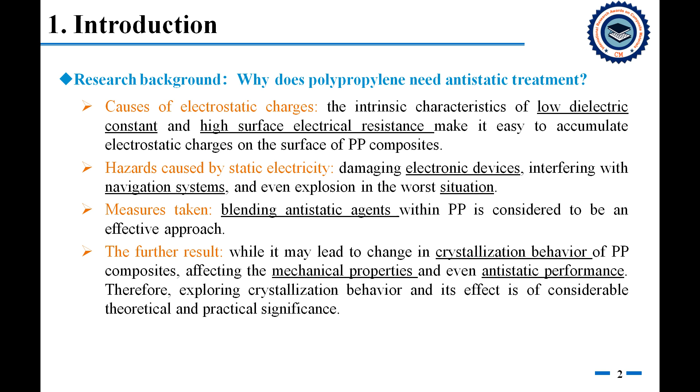The effective approach is blending antistatic agents with polypropylene. Then, we should consider the comprehensive results produced, such as crystallization behavior, mechanical properties, and even antistatic performance. Next, we review the research progress of antistatic composite materials. We found many conductive alternatives in fiber-reinforced polypropylene systems.

Carbon black was used. However, this type of filler needs more content than using carbon nanotubes. However, the dispersion of nanotubes requires a complicated pre-treatment process. Further, nickel-coated glass fiber was used as conductive filler to form a three-dimensional conductive network. However, this process involves some toxic material.

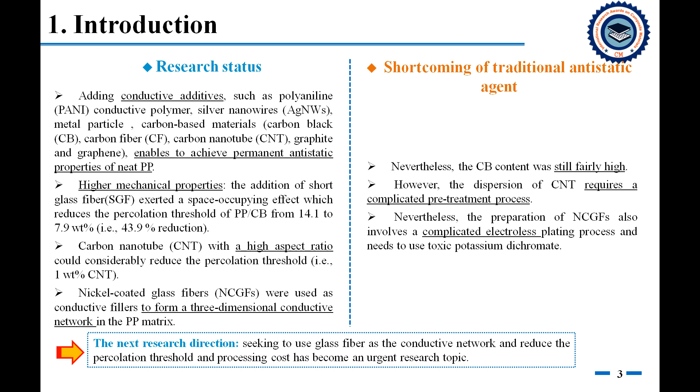Therefore, a promising organic salt emerged. Previous research found the percolation threshold of glass fiber reinforced polypropylene composites after adding organic salt is 0.25 weight%. Moreover, previous research used traditional high viscosity and isotactic polypropylene as a matrix and only explored the tensile strength. Nevertheless, there are still many technical gaps.

Such as crystallization behavior, the arrangement model of conductive particles, and the reasons for the increase and the decrease in the tensile strength. The chemical interaction mechanism among the organic salt, matrix, and long glass fiber. The other crystallization performance, such as nucleation and crystal growth rate, crystallite size distribution, phase, and lamellar thickness, as well as crystallinity. Polypropylene random copolymer with high weather resistance, low temperature brittleness, lower viscosity as a matrix.

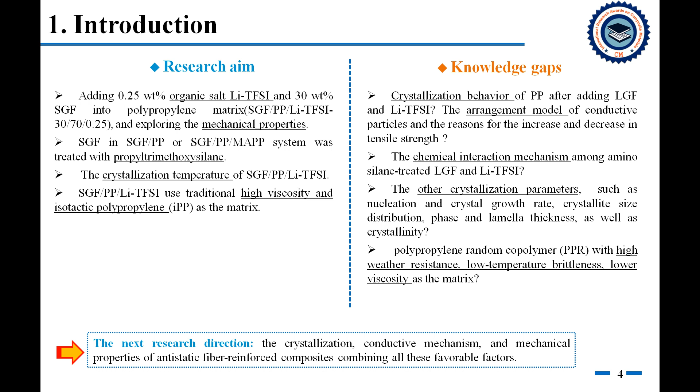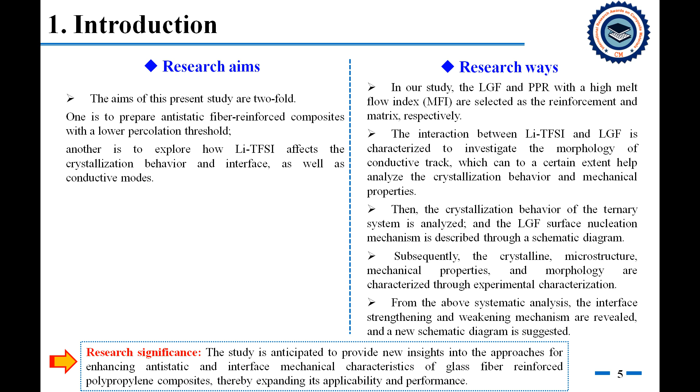Therefore, the aims of this present study are twofold. One is to prepare antistatic fiber-reinforced composites with a lower percolation threshold. Another is to explore how organic salt affects the crystallization behavior and interface, as well as conductive modes.

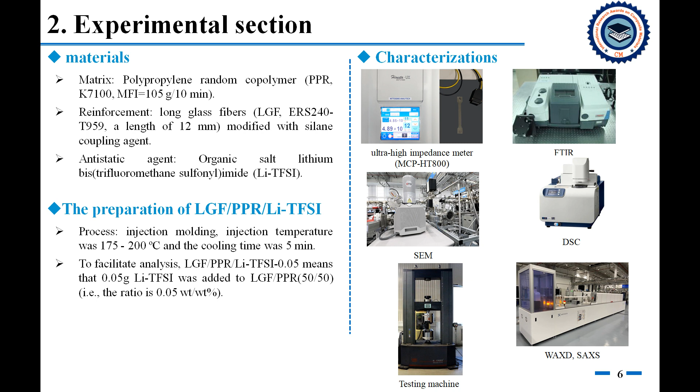The second section, experimental, will adopt the injection molding process to prepare antistatic long glass fiber reinforced polypropylene random copolymer, which contains organic salt. The corresponding physical, chemical, and mechanical properties, characterization, and equipment are as follows. The third section, results and discussion.

3.1 Interaction among organic salt, matrix and fiber. Using Fourier transform infrared spectroscopy to explore the interaction between the various components in the system, we found that a hydrogen bond is formed between the groups of organic salt with the groups of long glass fiber.

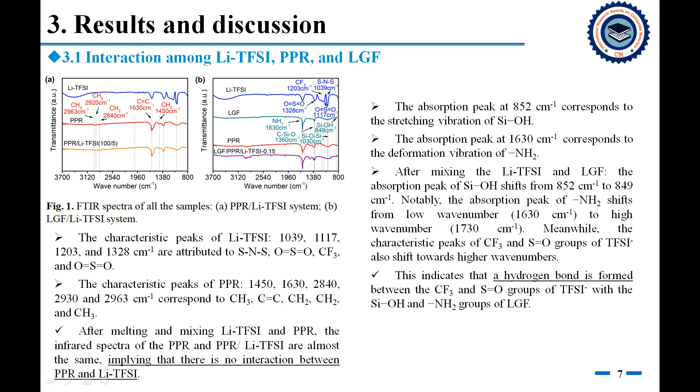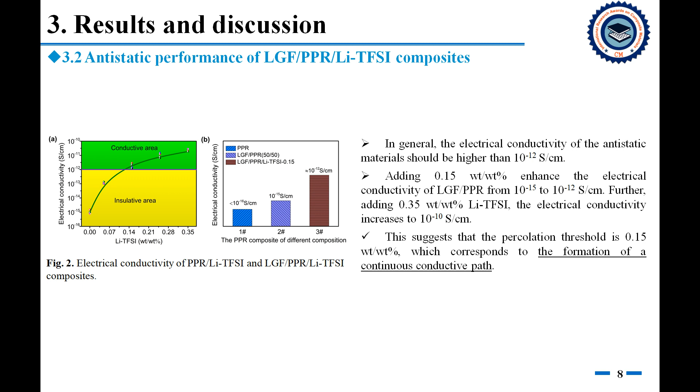3.2 Antistatic performances. We further explored the antistatic properties of the fiber-reinforced system. We found that adding 0.15 weight% enhanced the electrical conductivity of the composites to the lowest value of electrical conductivity of the antistatic materials. This suggests that the percolation threshold is 0.15 weight%, which corresponds to the formation of a continuous conductive path.

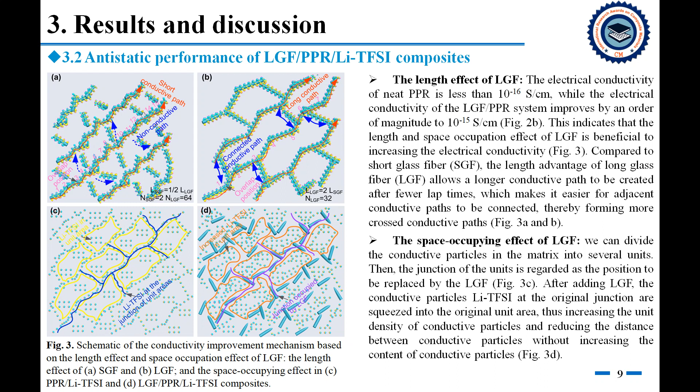Non-isothermal crystallization and subsequent melt behavior. From the crystallization curves of our samples, we obtain the relatively important crystallization parameters, such as the crystallization peak temperature, onset crystallization temperature, overall rate of crystallization, nucleation rate, and size distribution of crystallites, respectively. We have found the evolution of these parameters.

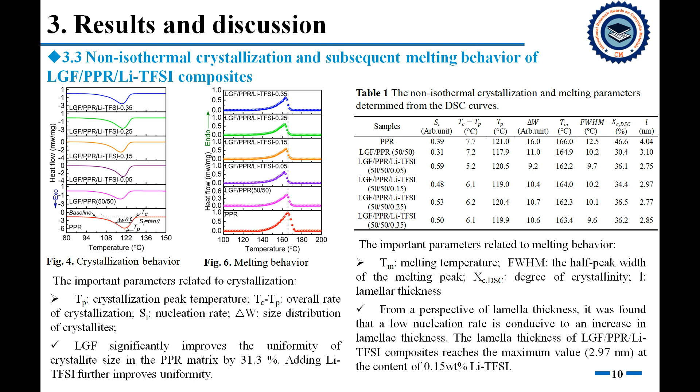According to these parameters, a schematic diagram of the nucleation mechanism is given. Homogeneous nucleation for neat matrix. Long glass fiber divides a large and complete matrix region into many small units, which hinders the movement of the chain segments. Adding 0.05 weight% organic salt significantly improves the nucleation rate by 90.3%, suggesting that organic salt can enhance the heterogeneous nucleation.

Adding 0.15 weight%, a conductive path has been formed. The nucleation rate decreases, implying that organic salt and long glass fiber generate competitive nucleation. Continually increasing the organic salt, the nucleation sites increase while crystallization rate decreases, implying that the free space for movement of the molecular segments in the matrix is squeezed.

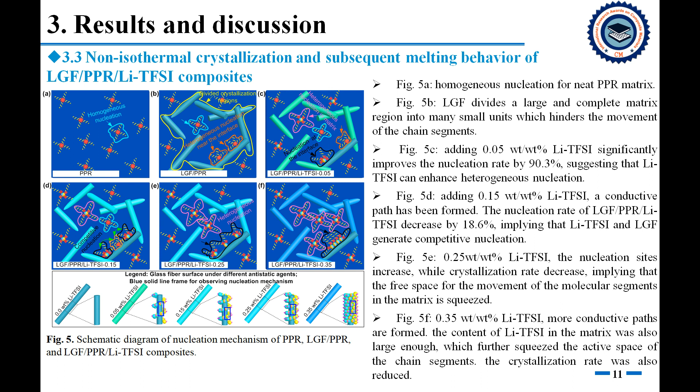We further studied the microstructure of the composite material, such as type of phase, the thickness of the lamellar crystal, and the growth direction of the lamellae, and obtained the evolution law, which laid the foundation for establishing the relationship with each of the mechanical properties.

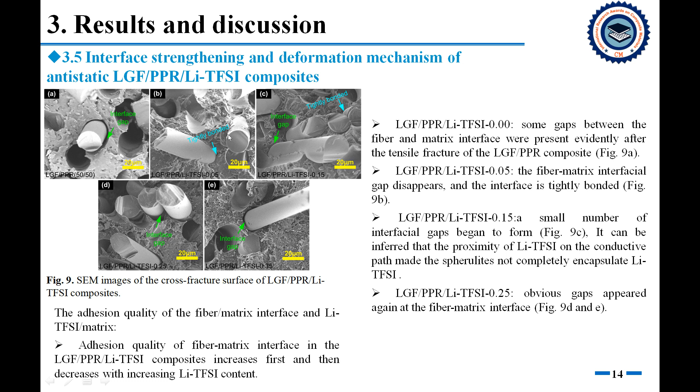Integrating crystallization behavior, crystal structure, mechanical properties, and failure mechanism, we draw a schematic diagram of interface strengthening and antistatic mechanism. First, without organic salt, the surface of long glass fiber cannot form a proper holding force, thereby causing the fibers to slip and fracture under the tensile loading.

After adding 0.05 weight% organic salt, organic salt has an anchoring effect on the matrix. The relatively larger contact area between organic salt and the matrix generated a stronger anchoring effect. When the content increases from 0.15 to 0.35 weight%, a close arrangement of organic salt at a concentration of 0.15 weight% on the glass fiber surface gave the composites a proper antistatic capacity. Nevertheless, this also reduced the effective contact area between organic salt and the matrix, decreasing the anchoring effect.

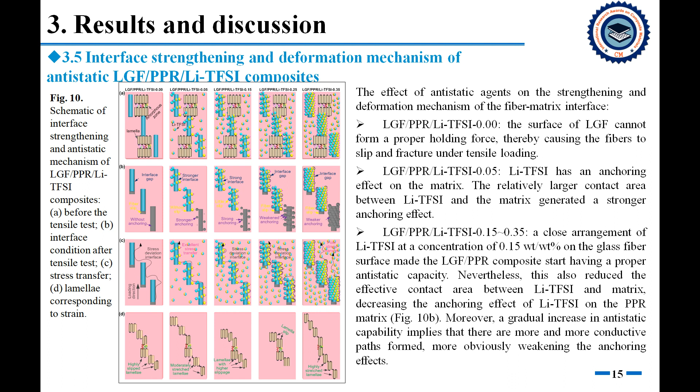Our work is expected to gain a new understanding of the crystallization behavior of the matrix enriched by organic salt and provide some fundamental data for further study for achieving better antistatic and mechanical properties.